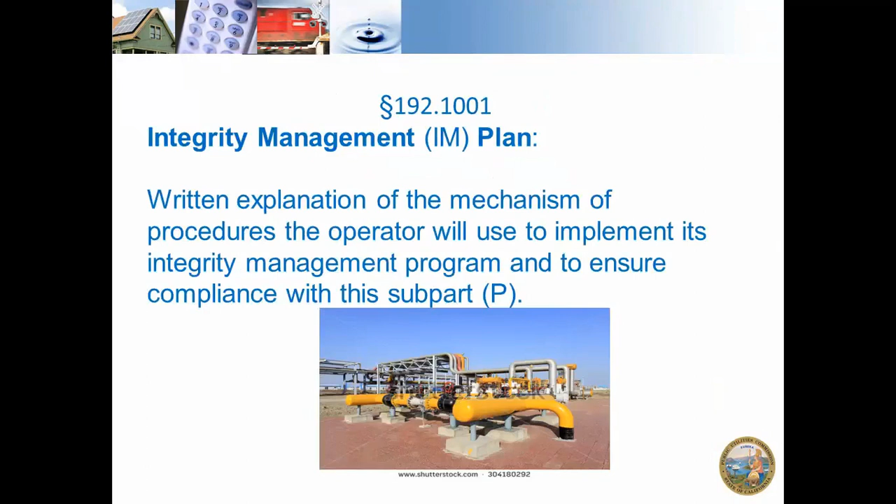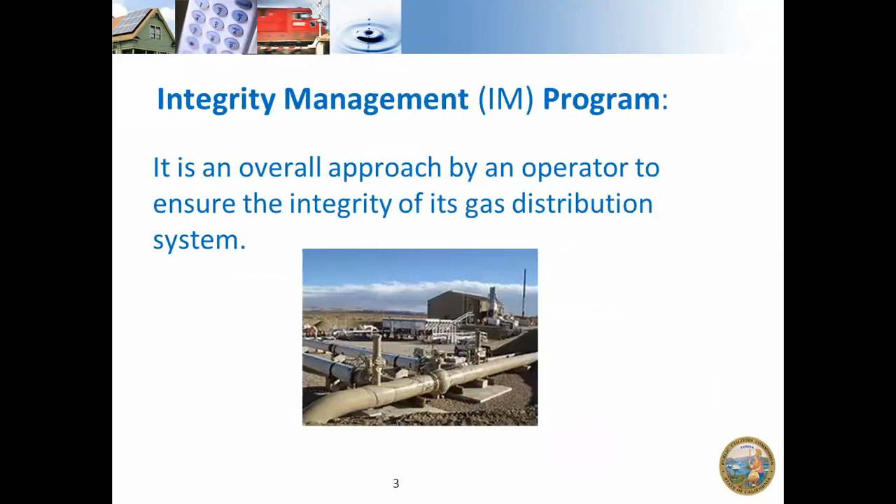So it is an approach by an operator. Anybody owning a park, he's an operator. It may be a person, a corporation, or any entity that operates a system.

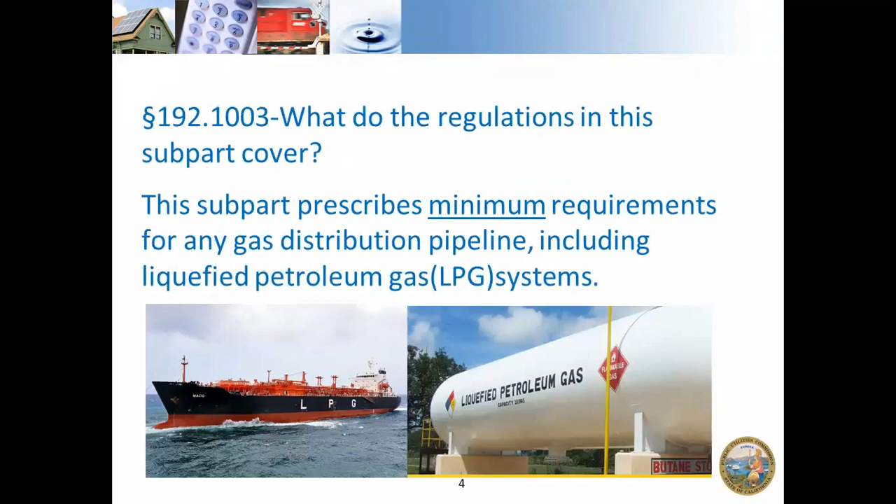So what it includes and covers is the minimum requirement for any gas distribution system, including the LPG, that we call propane system. MHP, fewer than 100 customers from a single source, and follow requirements of 1015 of this part.

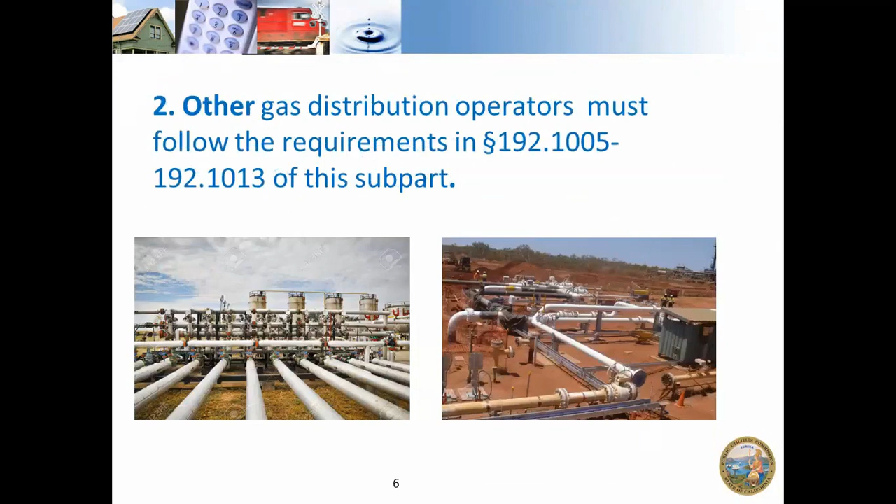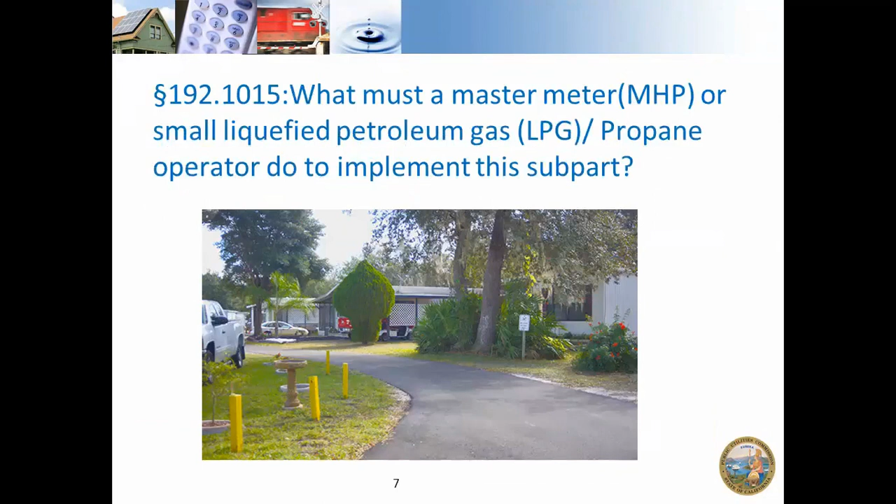Other gas distribution operators follow 1005 to 1013. So there are two parts: some follow 1015 and others follow 1013. This is MHP and propane. They're supposed to have this program in place no later than August 2011.

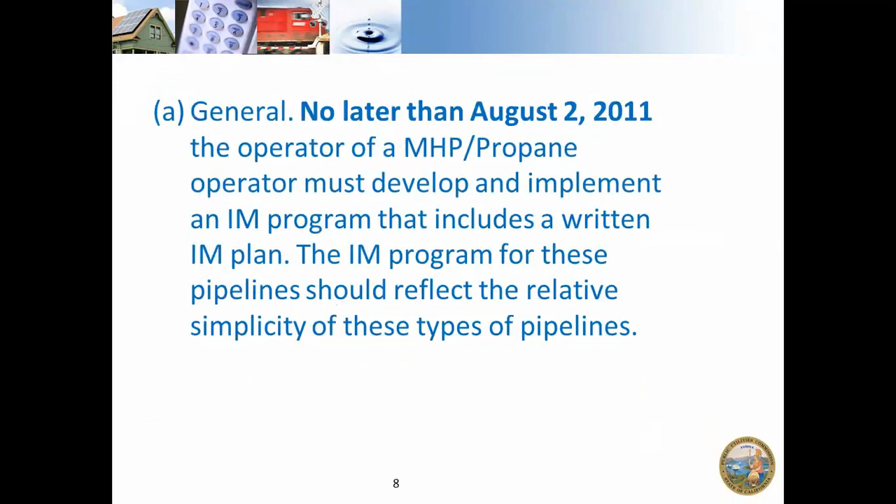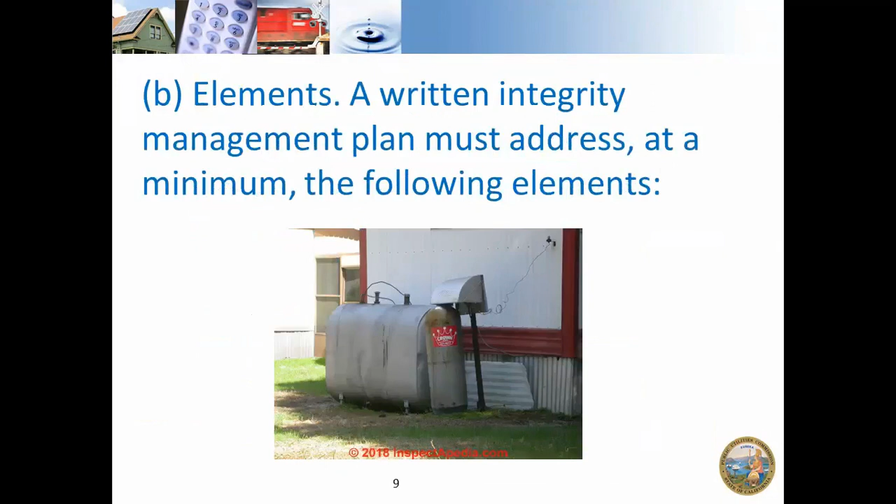So there are certain elements to prepare this program, and these are the minimum elements they must have. One is knowledge. The operator should have complete knowledge of their distribution piping system, their location, materials of pipeline - is it an iron pipe, a steel pipe, or PE, PVC, whatever. They should know what is there.

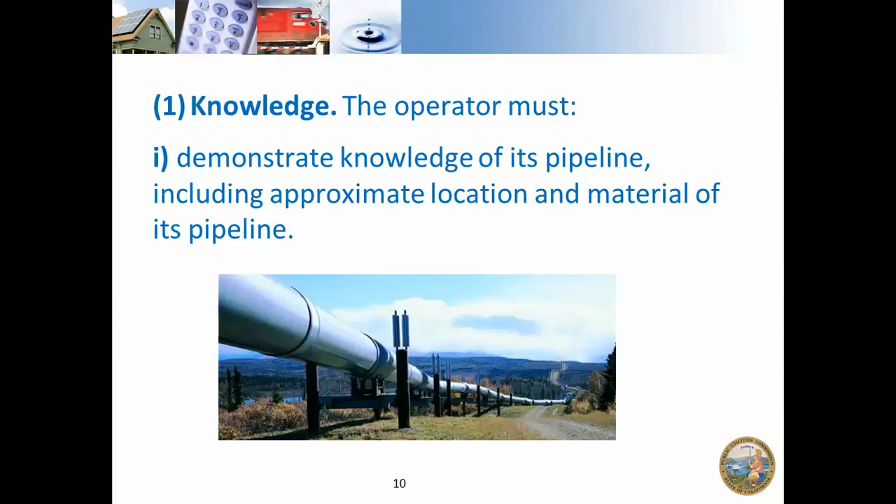Particularly, I've seen that when a new manager comes and says, I have no idea, I'm here for only 2 months, so I'm trying to learn.

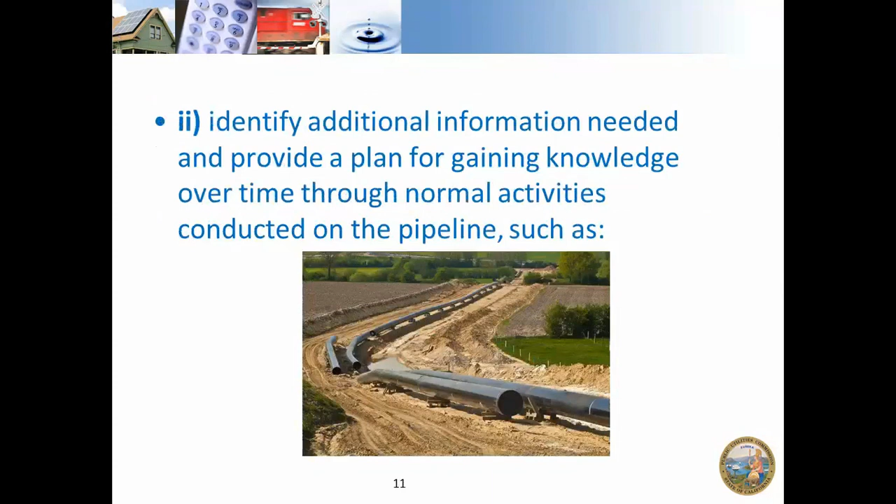So you identify additional information needed and provide a plan. You gain knowledge about your pipeline system, what material it is, and if there's any problem, and you conduct this program. You should know about the design, when or how it was designed, and when it was constructed, and operation and maintenance activities, like leak survey and patrolling. These are the covered tasks that you normally do. Once you're a manager operating a mobile home park, you should have knowledge of these activities.

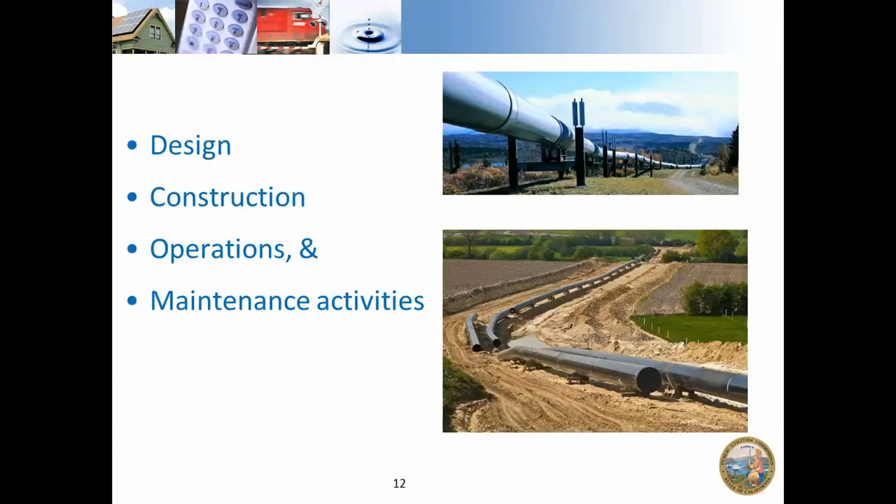Now, this is the important part: identify threats. It needs data, actually, for a couple of years back, whatever the lifetime of the pipeline is.

Corrosion is our main problem, or third-party damage, when contractors come to dig and install things on the pipeline, or prepare or repair a pipeline. They dig the area and there's an explosion or whatever - they hit the pipeline. So they call it third-party damage, like the contractor comes and hits a pipeline, and it explodes or causes fire. So it happens - that's excavation damage. And natural force, hurricane or earthquake, whatever, and other outside forces. So these are the threats.

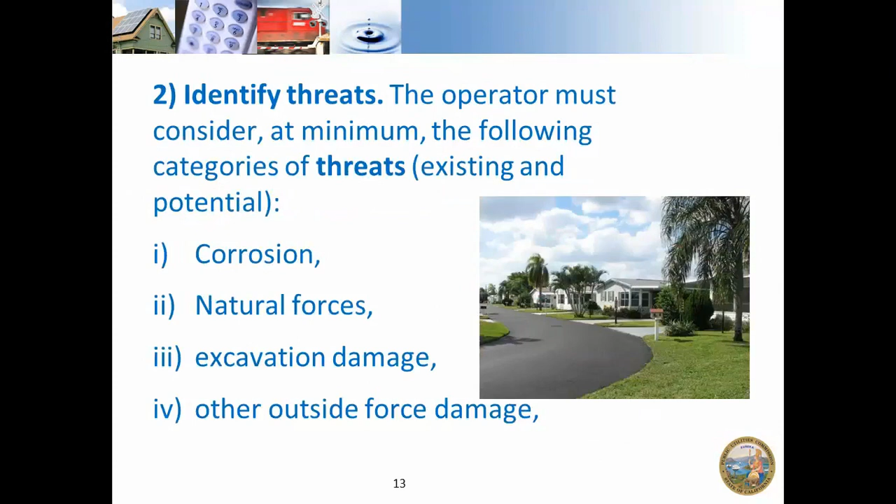So for your park, you need to identify which threat is the greatest one. For example, for leaks, over the last 4 years you may have 50 leaks. But for excavation damage, you have 70. So 70 is your number one threat. How do you need to mitigate it? This plan is about identifying this threat and preparing a plan to mitigate it. That's the whole purpose of this program - how you identify the threat and your plan to mitigate that threat is the main purpose of this report.

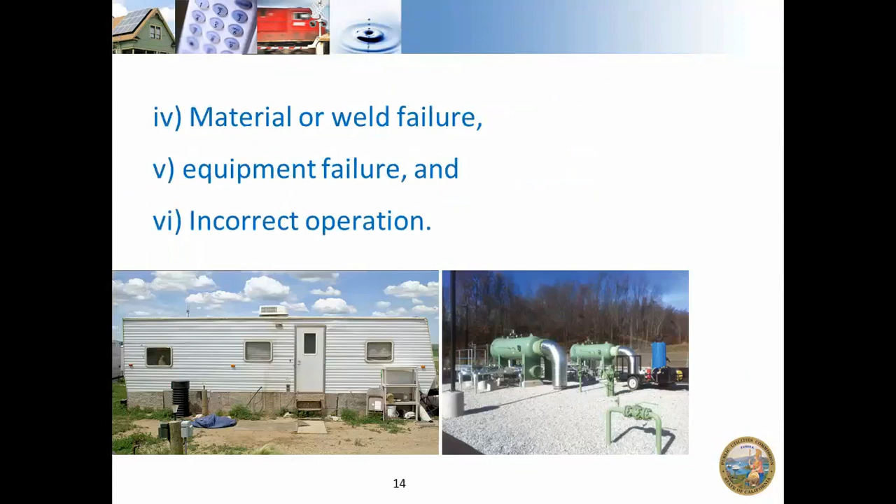There may be other issues like material or weld failure, equipment failure, and incorrect operation. So as I gave an example, you rank 1, 2, 3, 4 - which one is your best enemy? Is it corrosion? Is it third-party damage? Or is it material? Or natural forces? So number 1, 2, 3, 4, 5 - that's the rank risk.

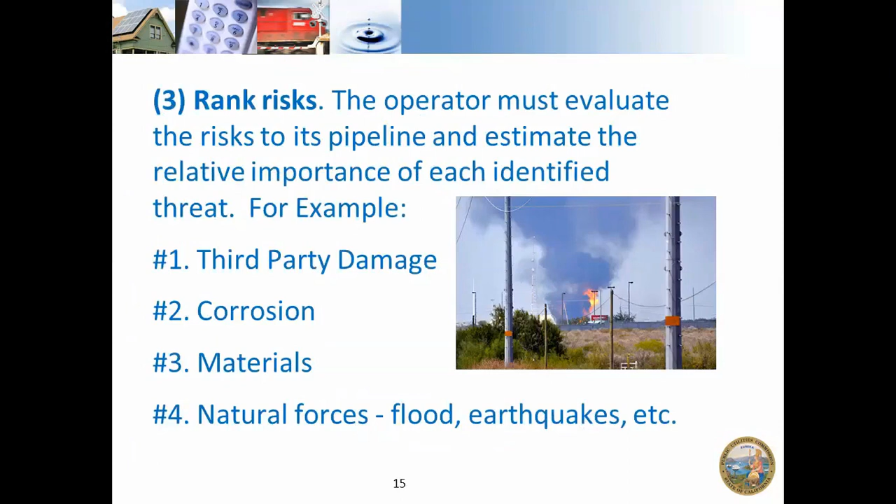So this is the part where you mitigate. You identify the risk and you mitigate. For example, for third-party damage, what can you do? You can make sure the contractor has a license and the person operating is qualified. This is how you mitigate the problem. Once he comes in, you can check what license he has, what qualification he has to do this job. This way you can mitigate your problem.

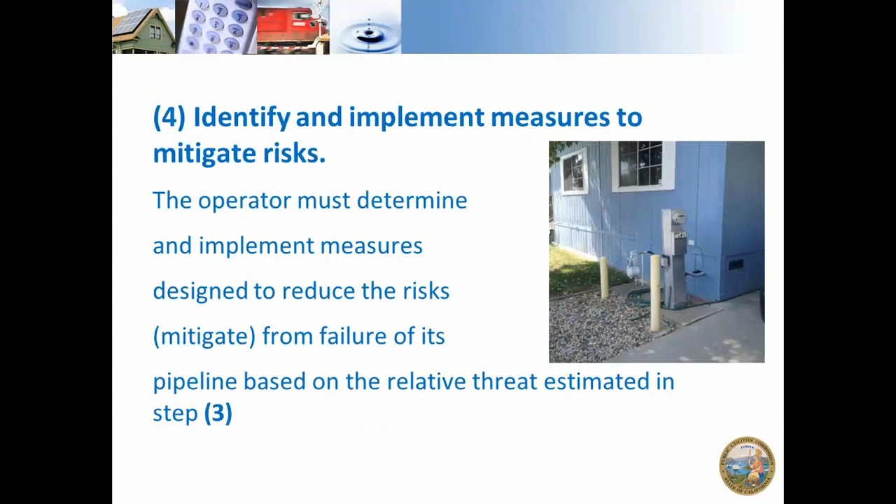And then you implement these measures to reduce the risk. We cannot completely make the risk zero - it's always there, but we can minimize it. That's the whole purpose of this program.

Once you measure performance, for the next few years you monitor - is your program working that way? After implementing this program, do you see that the number of incidents is reduced? That means your program is working. If not, you revise your program, and that's how you continue. Our purpose is safety, so we try to minimize all these incidents.

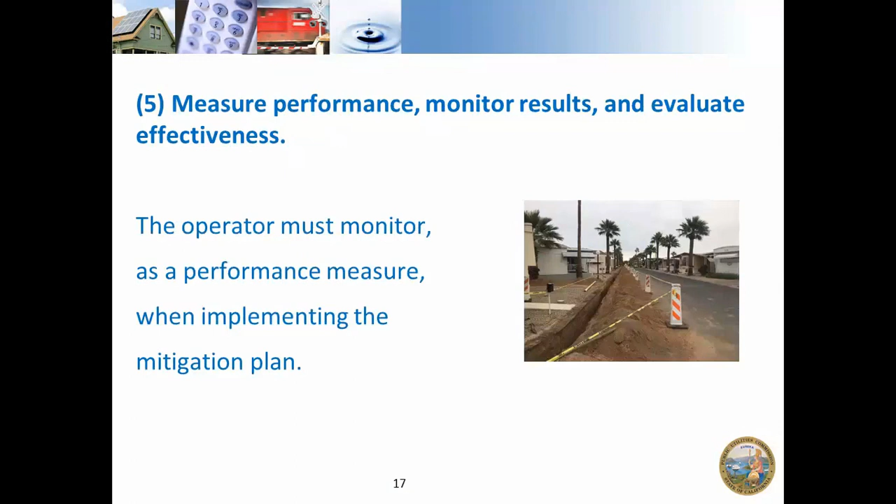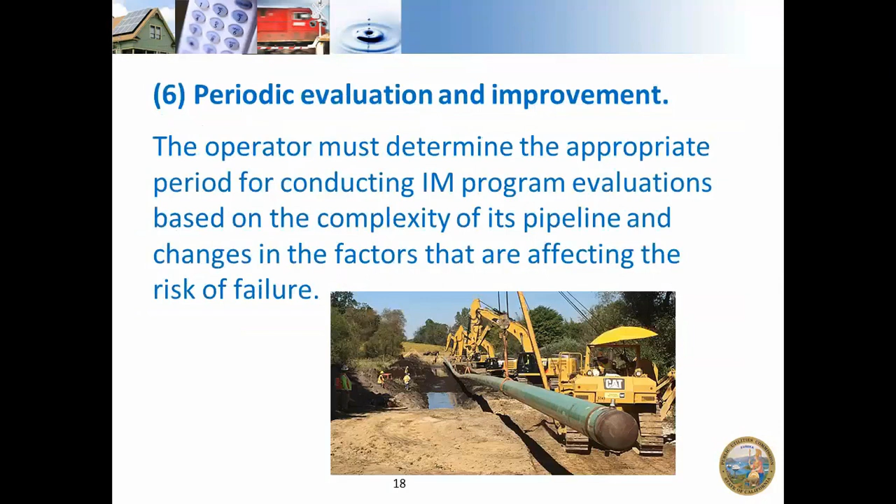So monitor and implement the mitigation plan. And then, as I said, you evaluate your program. By looking at the number of incidents, you can evaluate and improve your program.

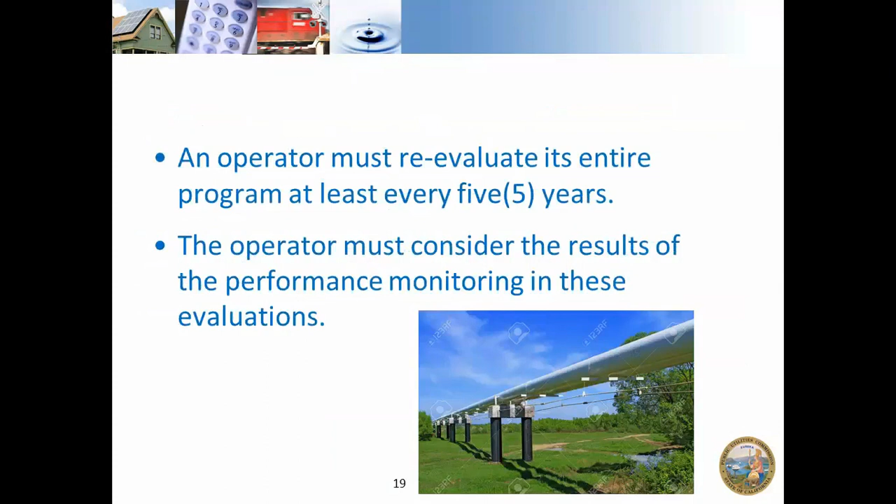Every 5 years, you need to revise your program, then revise the program, and do performance monitoring evaluations. So, record keeping - you need to keep all the records of this program for 10 years.

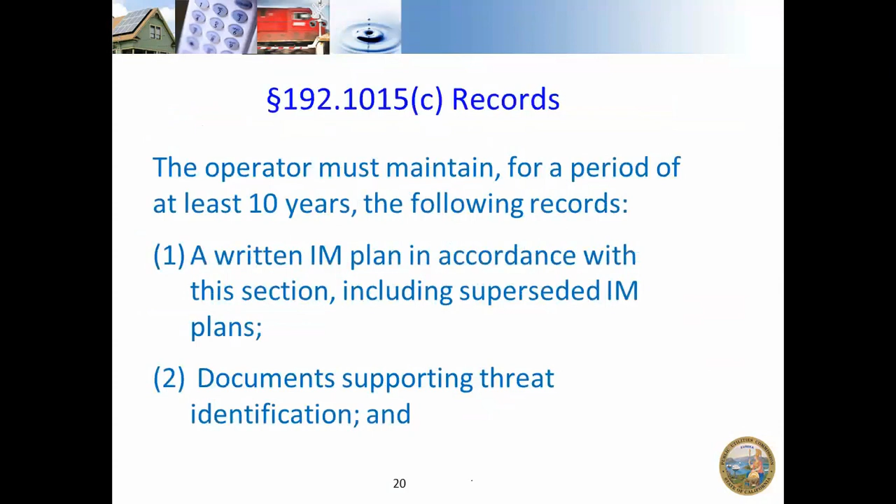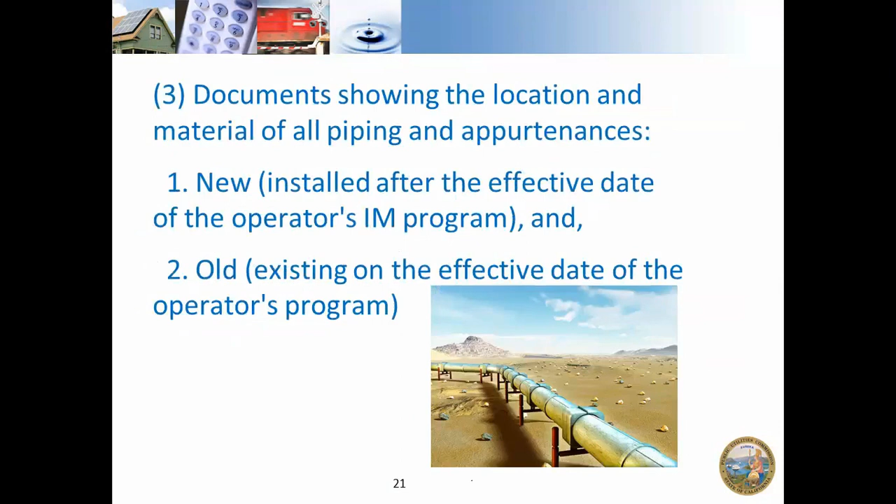Document supporting threat identification and the location and material of all piping. Keep all these records for 10 years - new, that is installed after the date of the operator's program, and old.

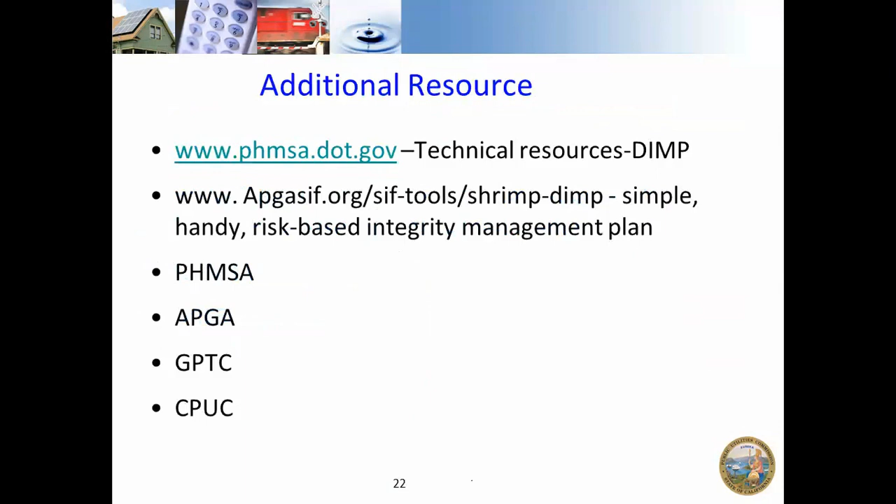Keep all the records, new and existing. These are other sources that you can get help for this DIMP program: PHMSA, APGA, CPUC. This is a summary of the DIMP program. Do you have any questions regarding the DIMP program?

You don't have to send it to us, but you should have it in your folder, like you have a folder for the operation and maintenance plan. You can keep this report, and we'll review it while we inspect your park. You don't have to submit it, but you should have that in your file. Anybody else? Any other?

Normally, we inspect parks every 3 to 7 or 8 years. Our database gives us a signal of due parks, and we schedule our parks when it is due. But I have seen some parks due at 4 or 5, even 7 years, because we are busy. How about Jason? What is the percentage that we are covered?